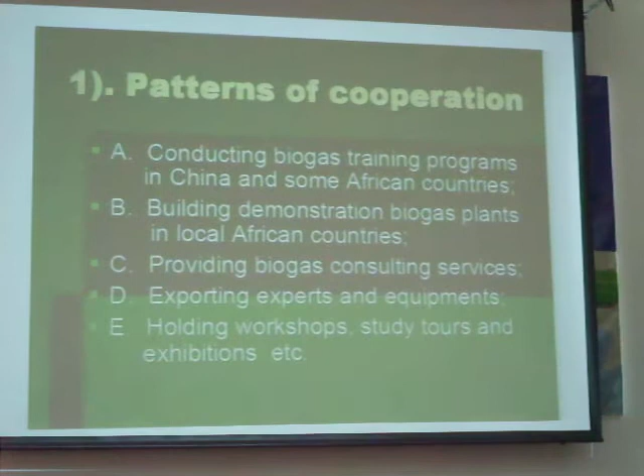One is conducting some biogas training programs in China and some African or Asian countries. Secondly, to build some demonstration biogas plants in local African or Asian countries. Third, to provide biogas consulting services, also exporting experts and equipment, and holding some workshops, study tours and exhibitions, like what we are doing this time.

Some major fields in biogas technology application. Generally speaking, the activities of biogas cooperation projects are in the following 3 or 4 major fields. First is rural household biogas digesters. Second is large and medium-sized biogas plants at animal farms. Third is industrial biogas plants for wastewater treatment.

Or also the decentralized wastewater treatment system, that is DEWATS. You know, DEWATS is mainly for domestic wastewater treatment, which is not treated in a centralized, pipeline way, but treated in an individual on-site way. That is, with no energy consumption, no management, and also for domestic waste, where we can get anaerobic and aerobic treatment at the same time.

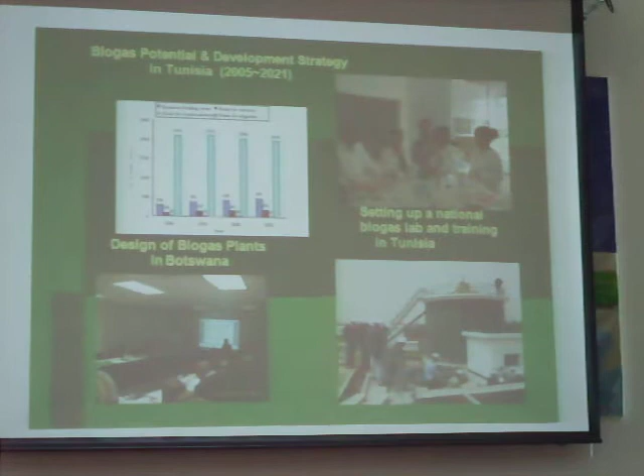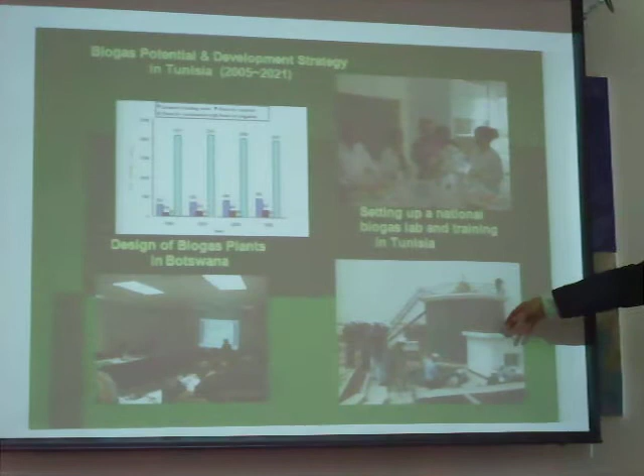Also, some activities we have conducted in other developing countries like Tunisia. For example, the first demonstration plant we built was a Chinese government donation project with a chicken farm. This plant was built in 1999 and was put into operation in 2000, and until now it's working very well.

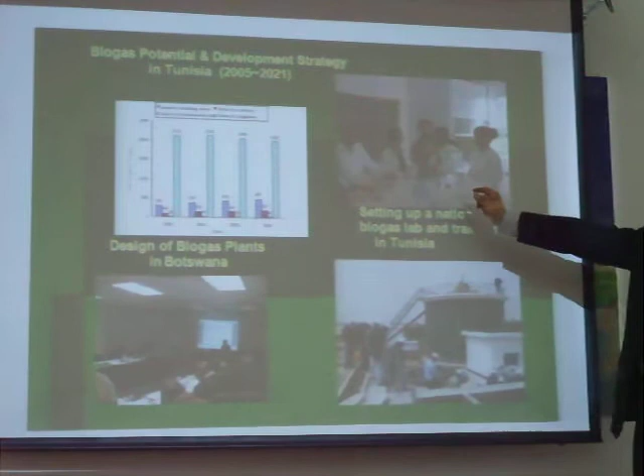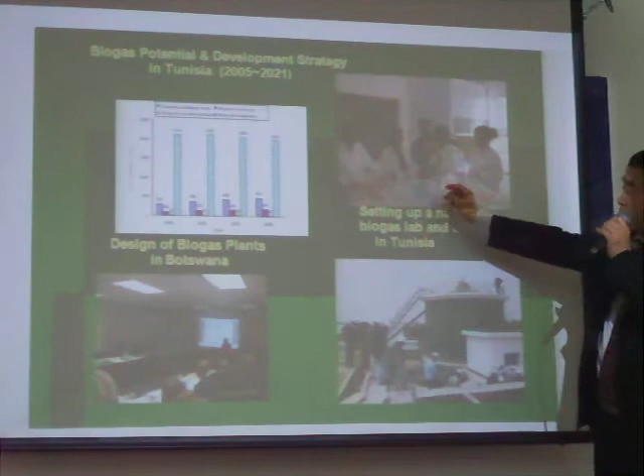And the second project we have done in Tunisia was also requested by the Tunisian government. We set up a national biogas lab, and all the equipment for the laboratory was sent from China to Tunisia. And some professors came for the training in Tunisia.

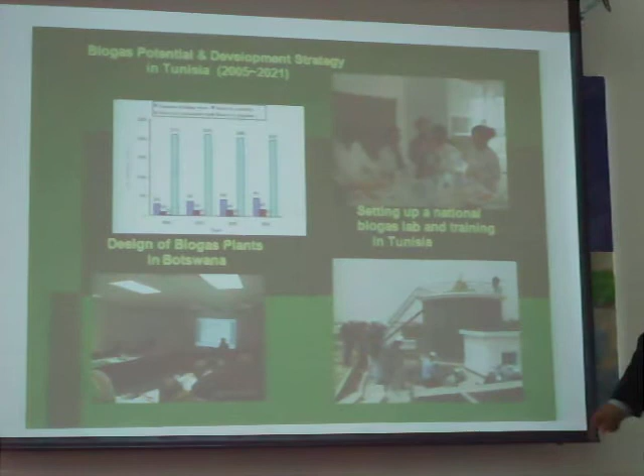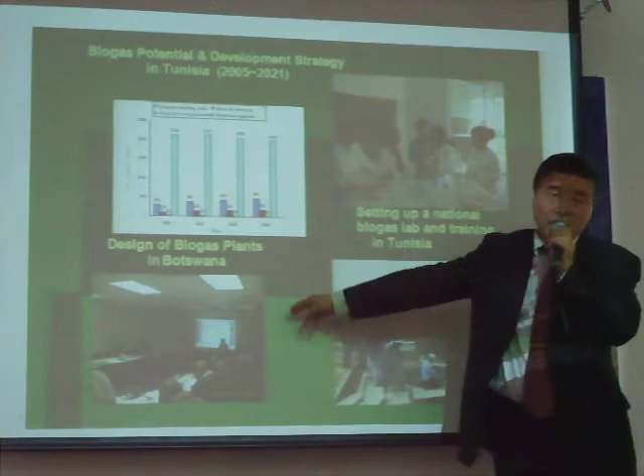And also we have done a national feasibility study, a biogas potential study and a strategic study, determining the potential and the development strategy in Tunisia. So that is one of our activities. Another is we also gave some designs in Botswana, so different African and Asian countries.

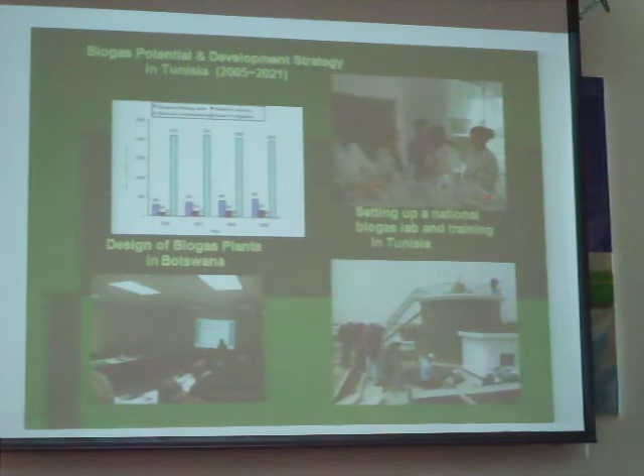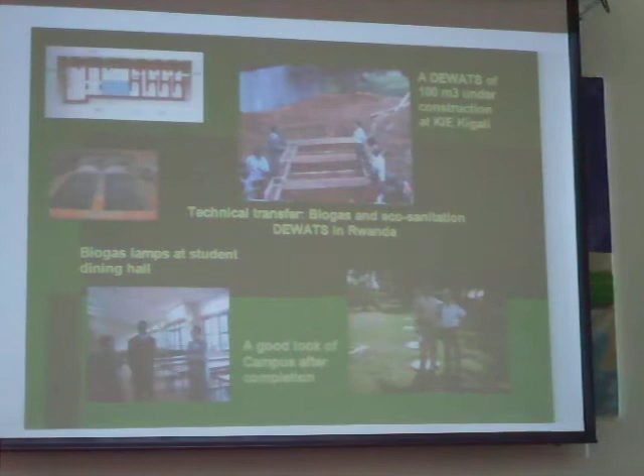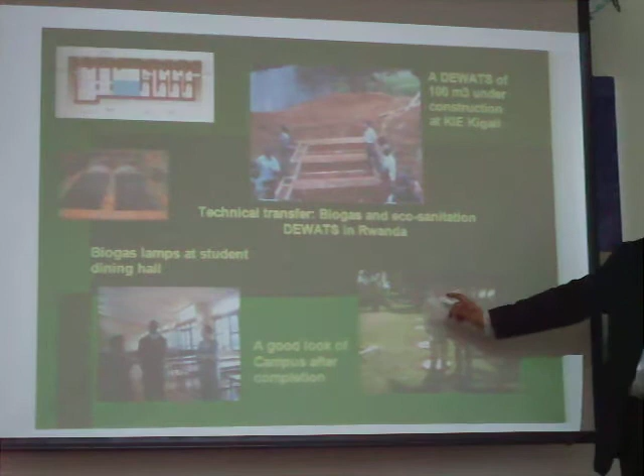This is another system we have done, a DEWATS system. This was in Rwanda. We did some work there. You see, this is a university compound. Before building the system, when you entered this campus, everywhere it smelled very bad because the sewage flowed everywhere. So the principal of the university complained a lot.

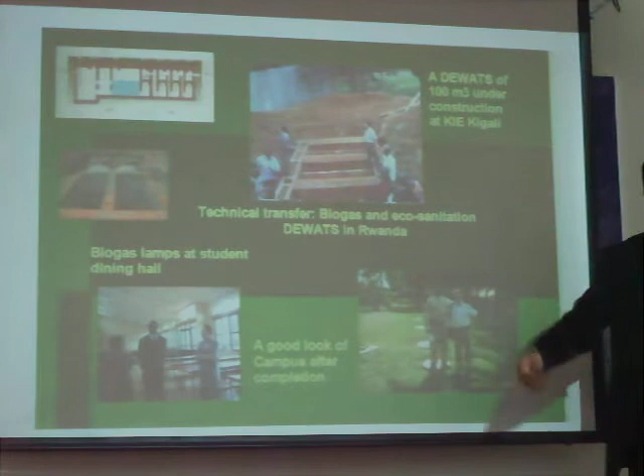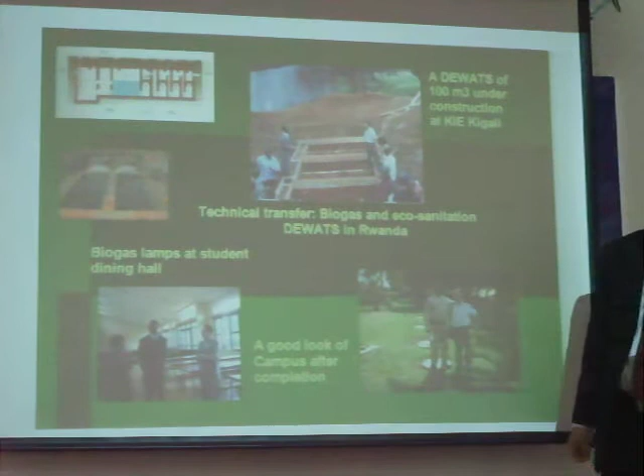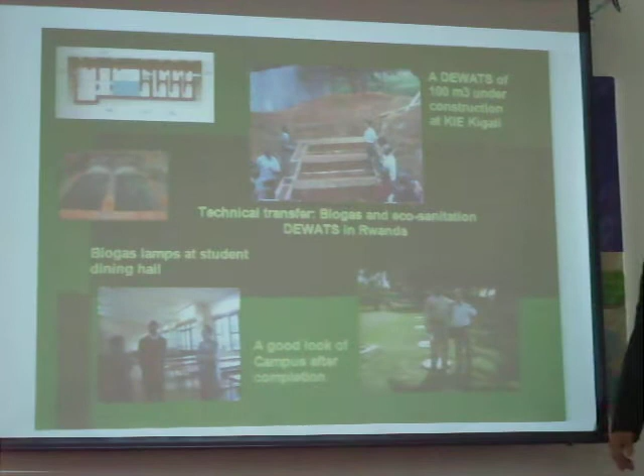So he urgently requested us to find a solution. Then I said, it's okay, we can build one plant for you. Then it solved the problem of domestic sewage. Originally, it was planned for treatment of 300 students' wastewater, but actually it handles the sewage of more than 400 students from the students' dormitory.

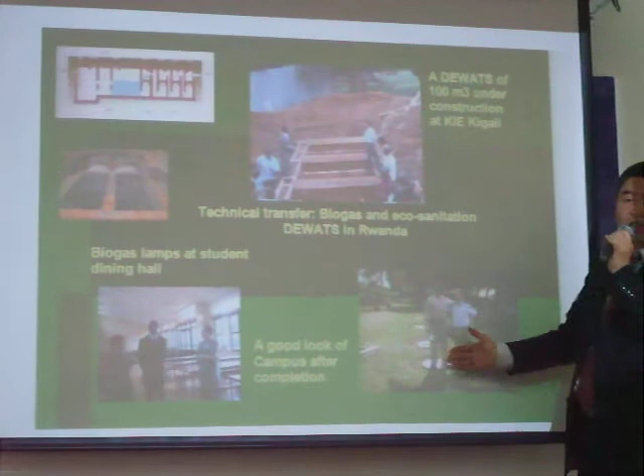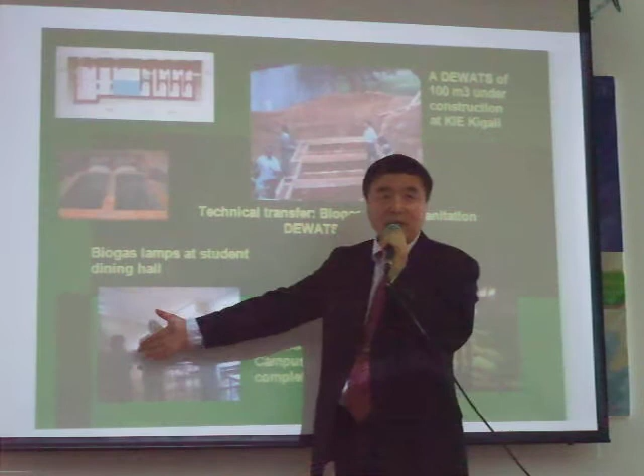Then our ambassador and the Minister of Foreign Affairs came to see it, because not only does it help the sanitation and the environment, and it looks nice, but on the other hand, it gives fuel for lighting and cooking in the students' dining hall.

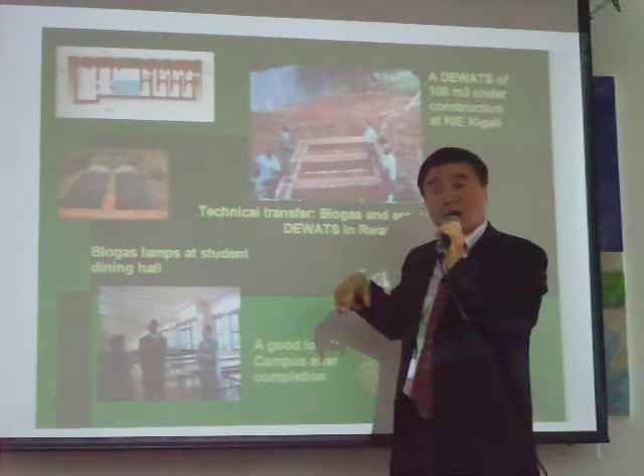Here, this is a dining hall for the students. Because there, even up to now, there is a shortage of electricity. In the evening, students came to enjoy the light from the biogas.

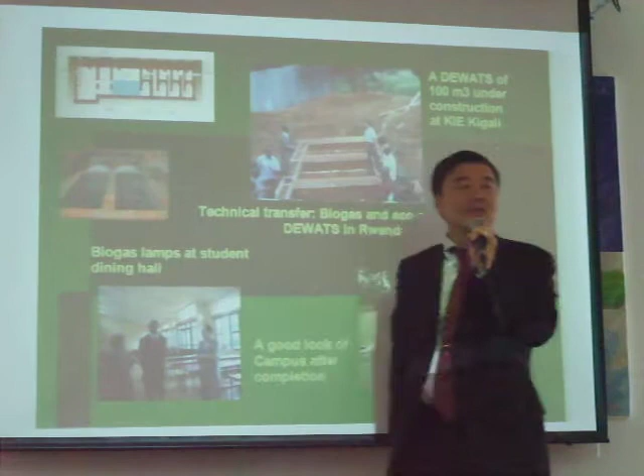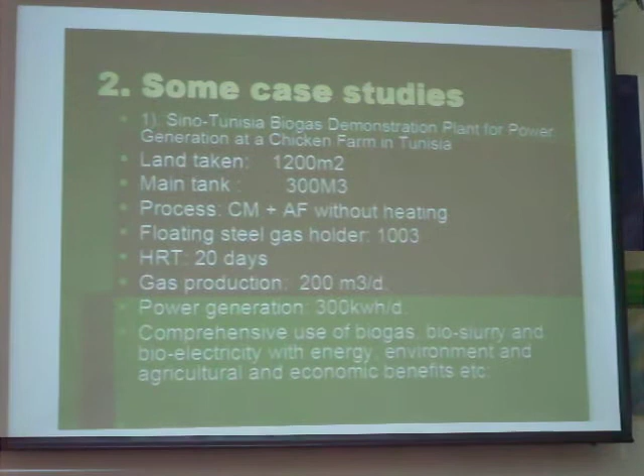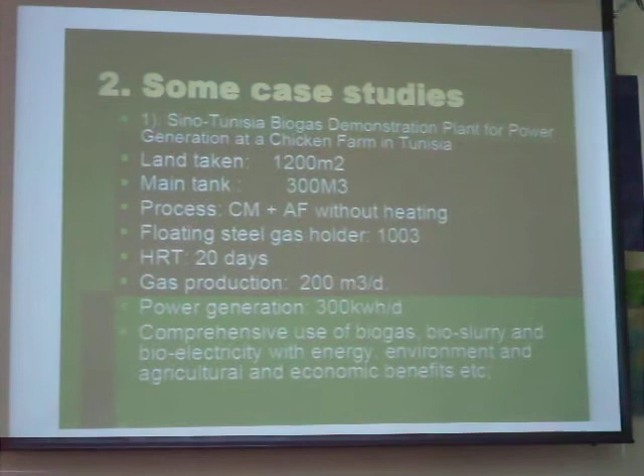That is the big plant we have built. One is in Tunisia, another is in Tanzania. Also, we can give some case study here, like the land. It's a wasteland. We chose a poultry farm, animal farm, and plantation. So the land take is 1,200 square meters, and the main tank is 300 cubic meters.

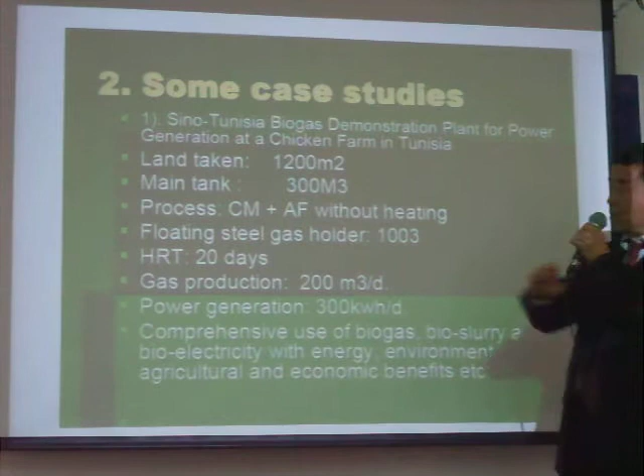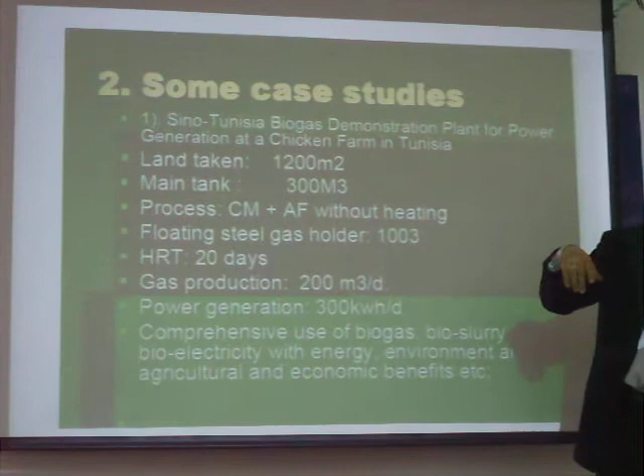And the process we take is complete mixing plus AF, the anaerobic filter, without a heating system. But in summer, it's too much gas. They cannot use all, then release some gas. The floating gas holder, sorry, here it should be 100 cubic meters. There's a small mistake. And HRT is 20 days.

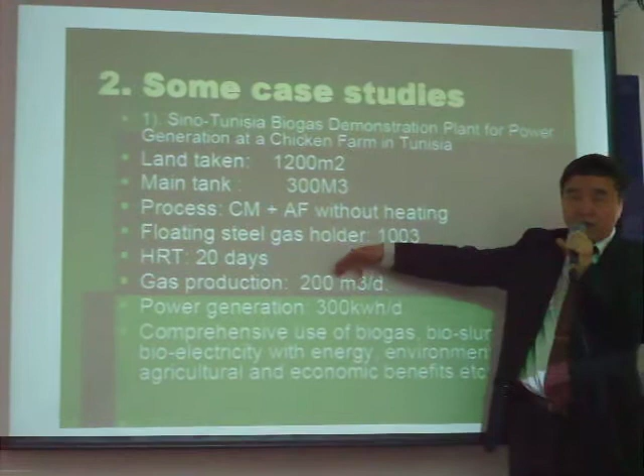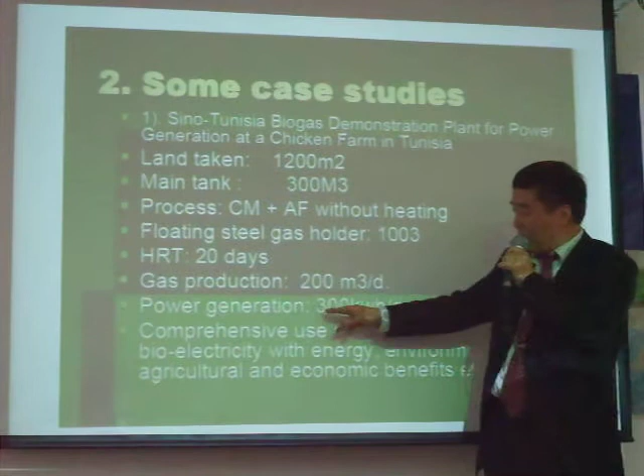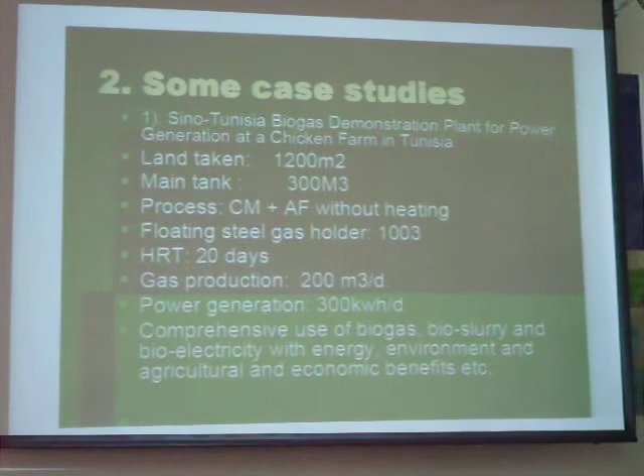And gas production is designed for 200 cubic meters per day. But actually, sometimes in summer you can get about 250. And power generation is about 300 kilowatt hours per day. A comprehensive use of biogas, bioslurry, and bioelectricity with energy, environment, agriculture and economic benefits. That is a model for this plant.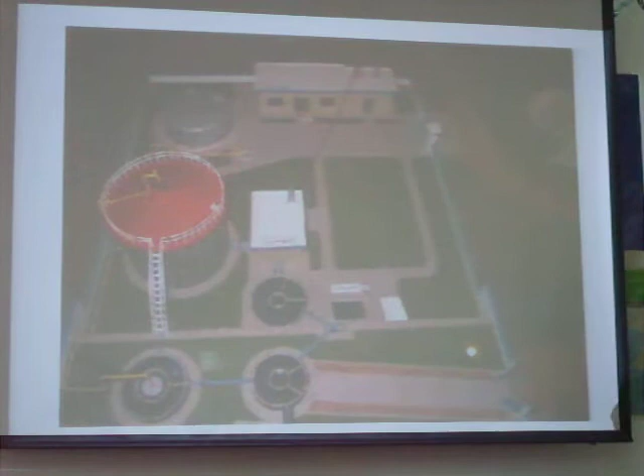In this model, for example, if in your factory you first want to build or design a biogas plant, you should have a model, not only the drawing for designing, but also a model to demonstrate. For example, this is the front gate. This is in the farm. This is the side gate. Then the slurry comes this way to the pretreatment tank, then going to the pumping house.

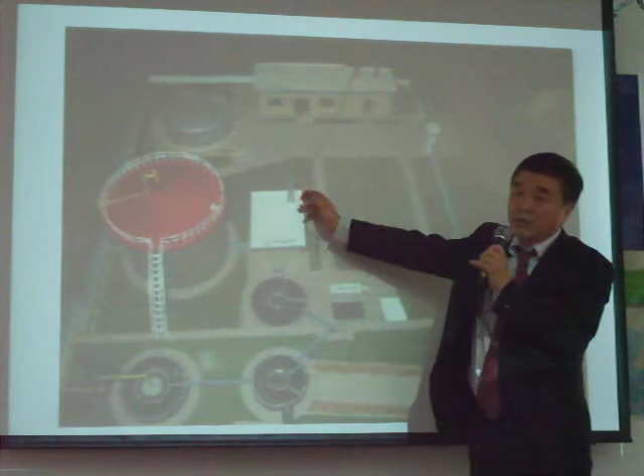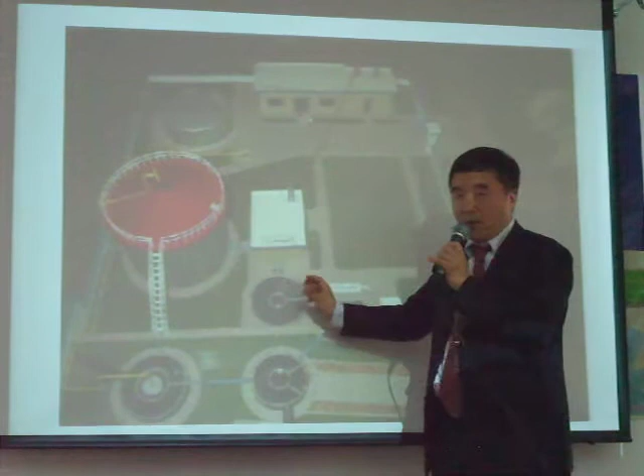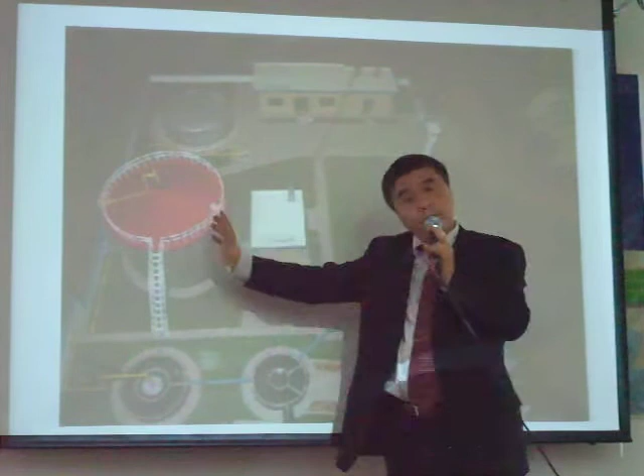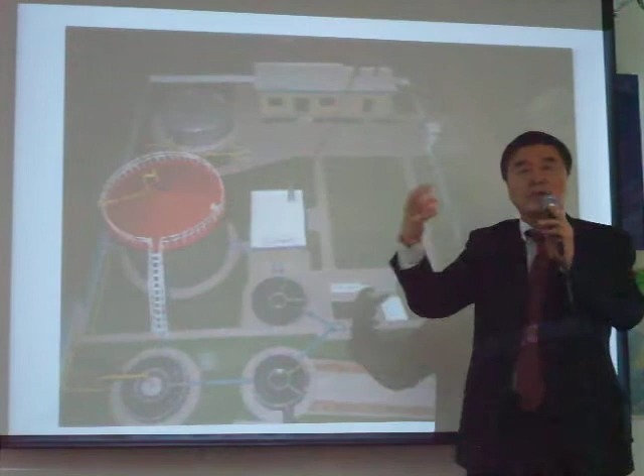From the pumping house goes the slurry, fresh chicken manure mixed with some water in proper concentration. Then it gives gas here from the main tank. This main tank at that time was built with concrete. And inside, we put some filter, so it can absorb many bacteria, methane bacteria, which gives more gas. The yellow line is the gas, which is collected in the floating gas holder. Then the gas is supplied to the generator house.

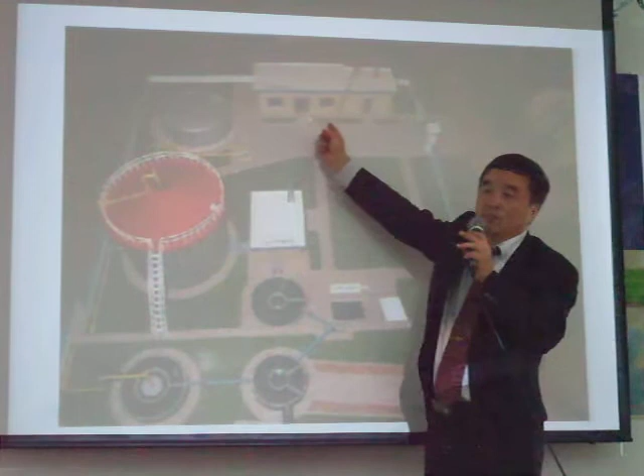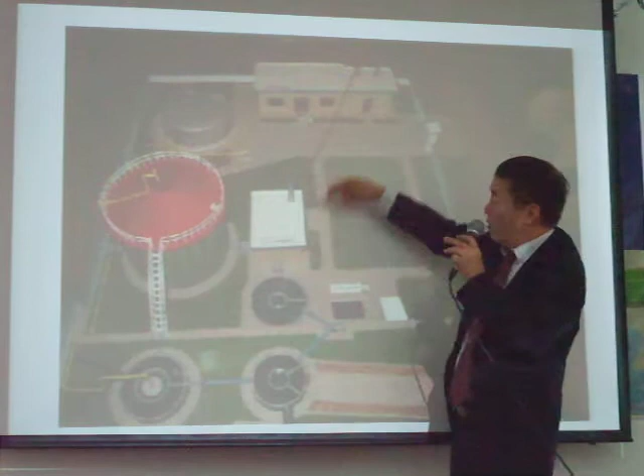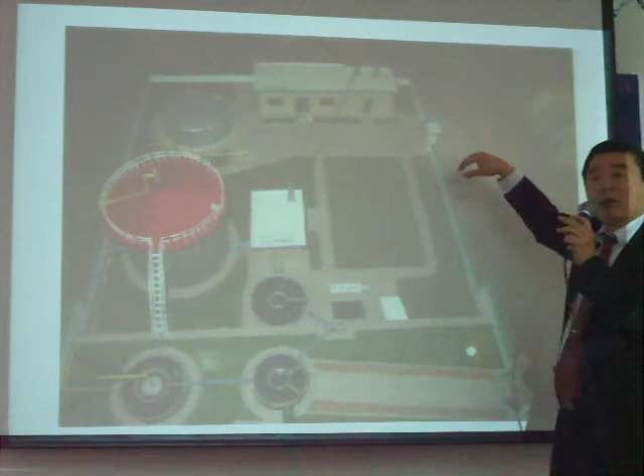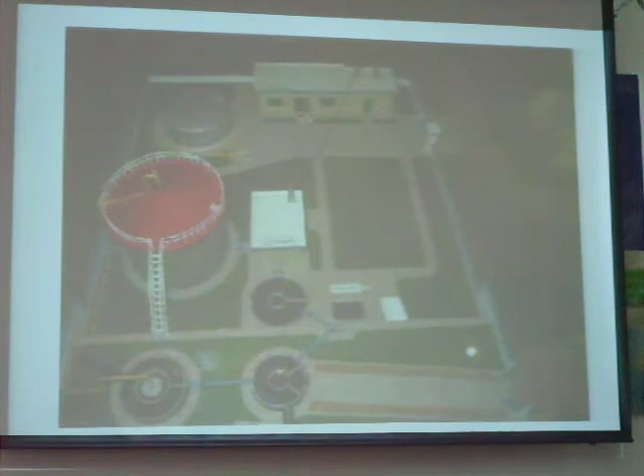From the generator house, part of the electricity is used for the biogas station for pumping or other pumping. Then the other electricity goes to the farm for other machinery or chicken house use. So that is the model which is used for national exhibitions, for environment, renewable energy, or agriculture exhibitions. Because this is a greenhouse, the bioslurry is used everywhere in this farm.

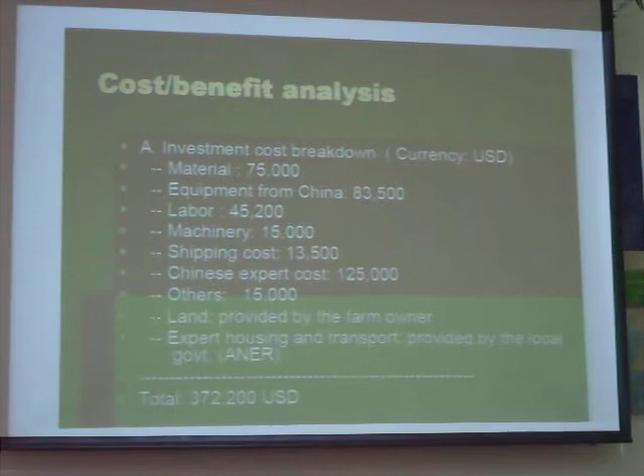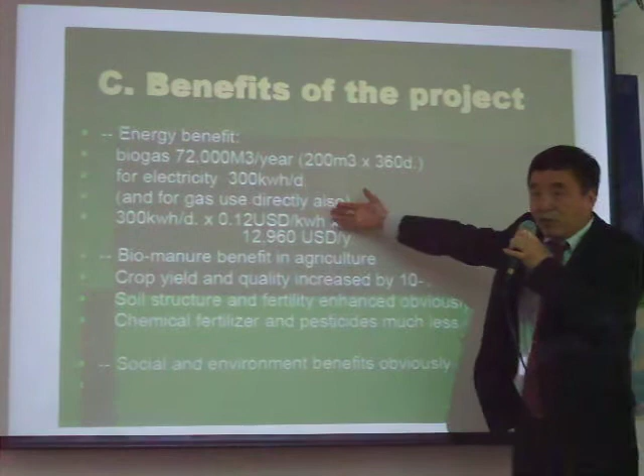So this, we can see the biomanure. This is the energy benefit. This is the biomanure benefit for agriculture. So biogas could be multifunctional for energy, for agriculture, and for sanitation and environment. So that is why government and people are now much more aware of biogas.

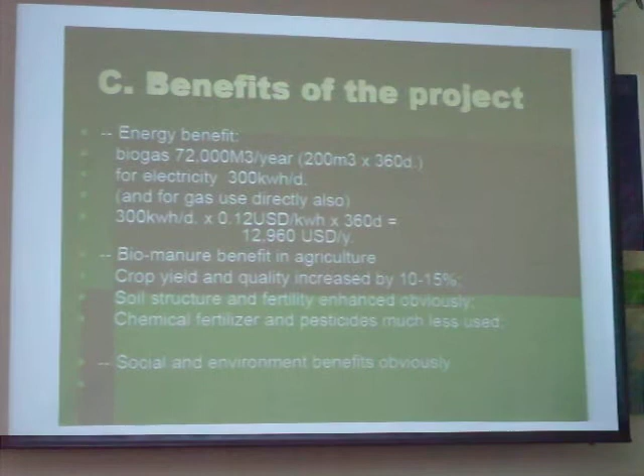You see, even at this time in Africa, many government officials, even the governor, say it is not an alternative, but it is a must for our government to start to build biogas systems. It is not an alternative, but a must. So they realize the importance of biogas technology, and also some social and environmental benefits.

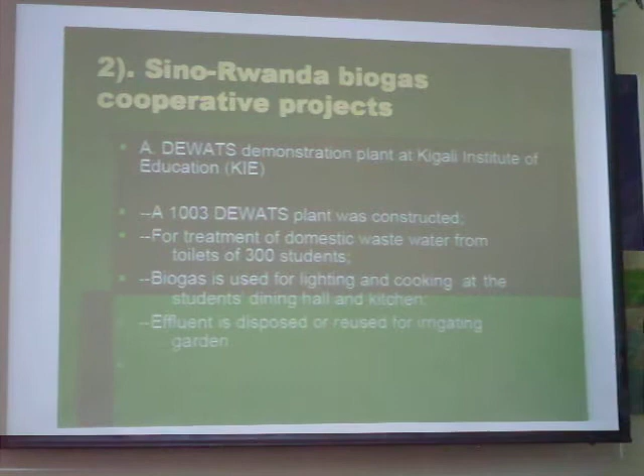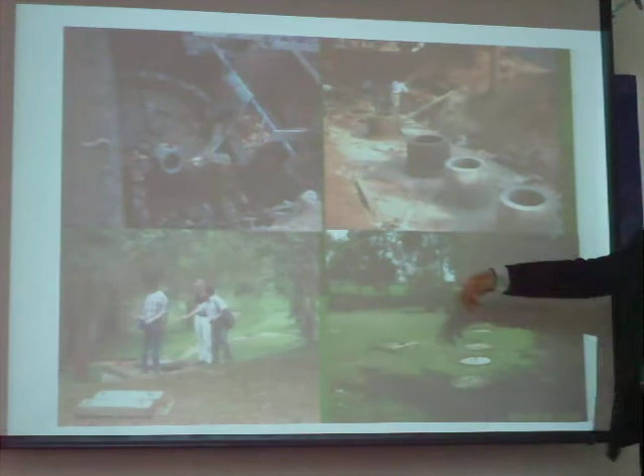Also another case study is a DEWATS system. We can see DEWATS for treatment of domestic wastewater. So like this, if we compare with the site before building the biogas system, they dug a lot of channels, and they don't have space to hold the sewage. Then the sewage comes everywhere in this small hilly area in this campus.

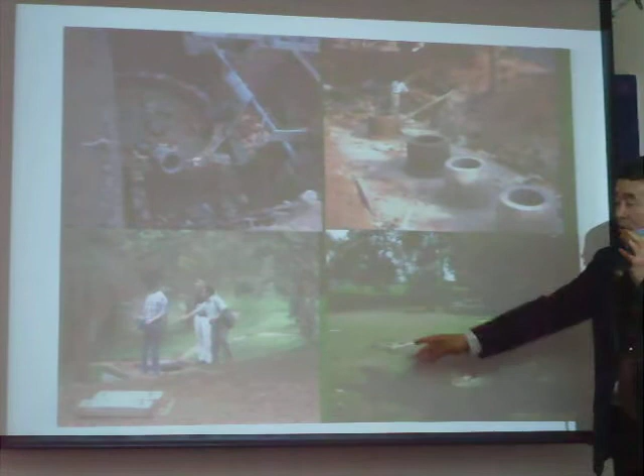So students and teachers all complained about this. Then after this, it solved this problem. So after it was built, the International Red Cross came to evaluate also. This is construction underway.

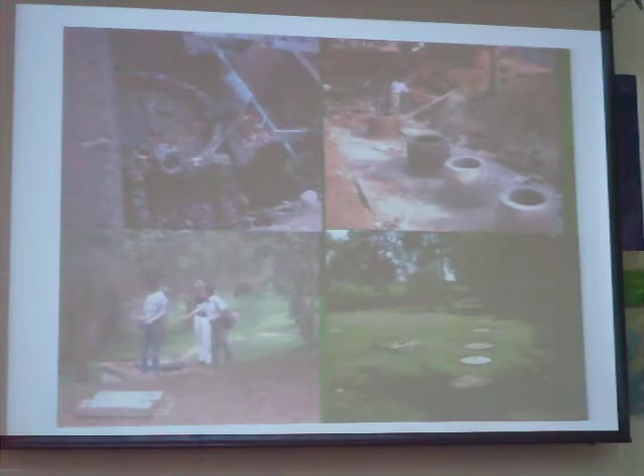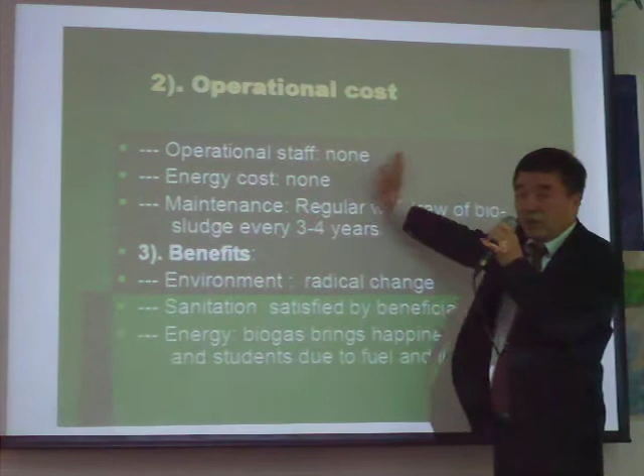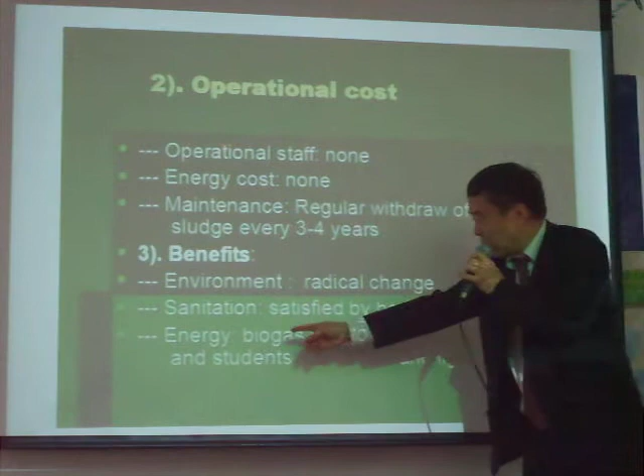Some benefits for this plant also. The cost study and the operation cost. So you see this operational cost is zero, energy cost is zero, and maintenance is only some regular withdrawal of biosludge every 3 or 4 years. And some benefits from the environment give a very radical change, and the sanitation is very satisfying to the beneficiaries, and energy biogas brings happiness to the kitchen and the students due to the fuel and lighting. So this is a very successful case as well.

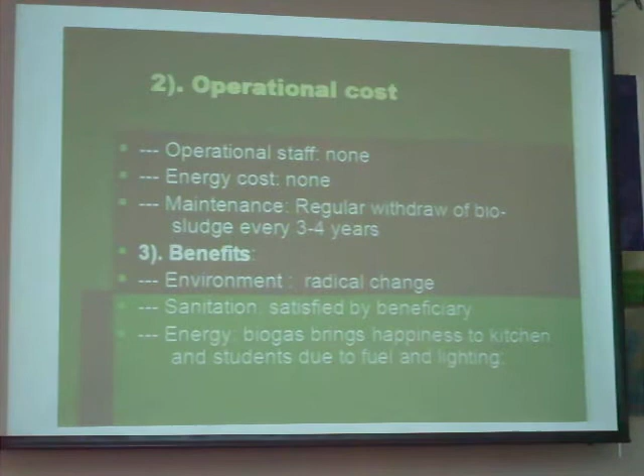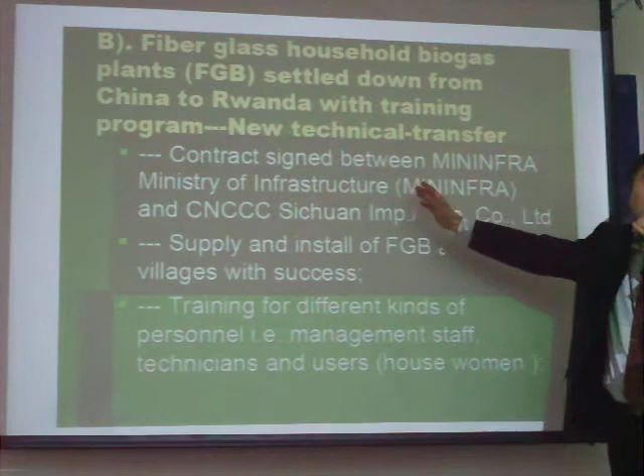Then we come to the domestic biogas plants, which we have done in some Asian or developing countries. For this, we have conducted one contract with the Ministry of Infrastructure in Rwanda, and this was directed after the first demonstration project, government to government. Then the Chinese enterprise, that is CNCCC Sichuan, signed; I, on behalf of this company, signed the contract directly with the Minister of Infrastructure in charge of energy.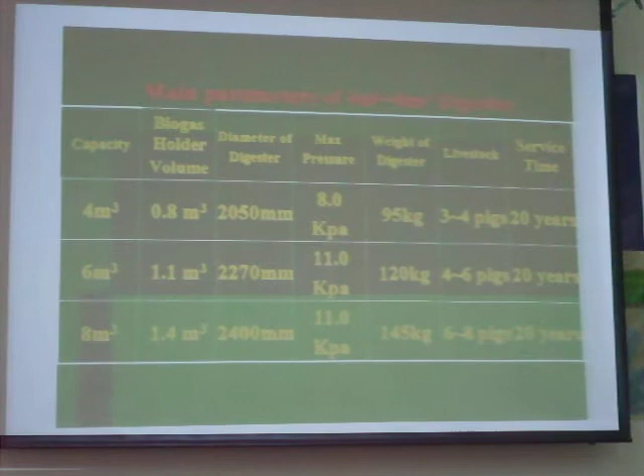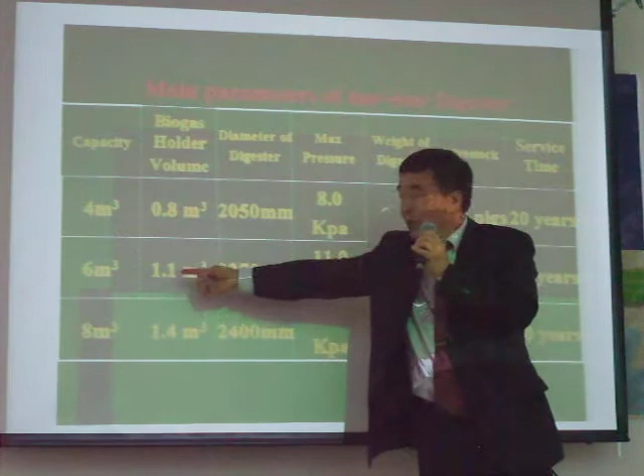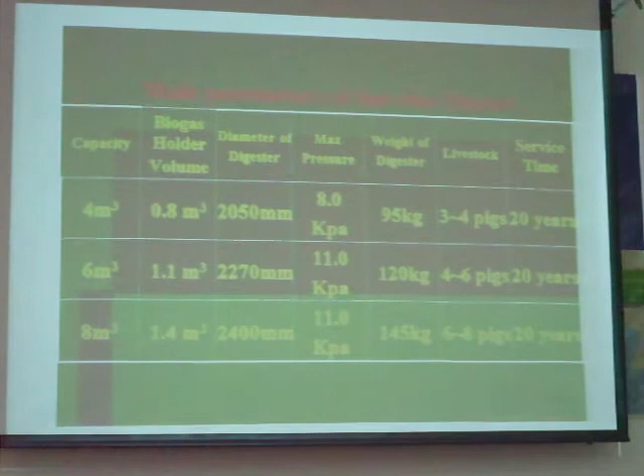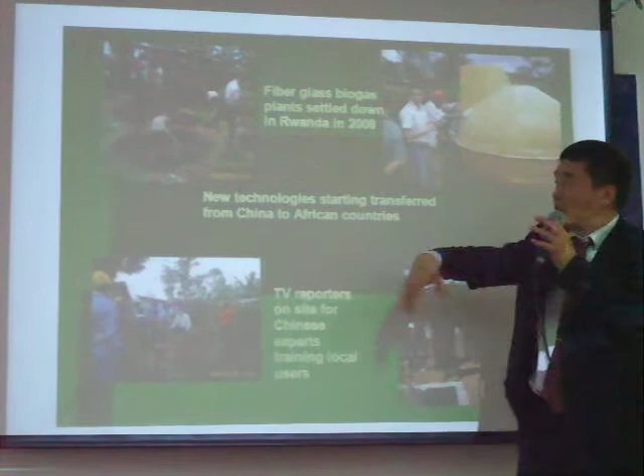Some key parameters: you see, this is the volume for different sizes of this plant. Normally we take 6 cubic meters. This is the diameter, then this is the weight, and this is the livestock which is going to be used. This is the lifespan, more than 20 years without maintenance. We see it under construction, because the plant could be designed differently according to the size, maybe in a straight way or in another way. You see this plant here, in the triangle way, still it works.

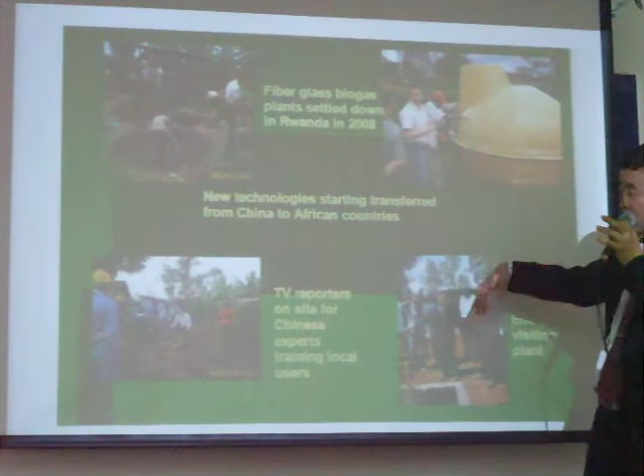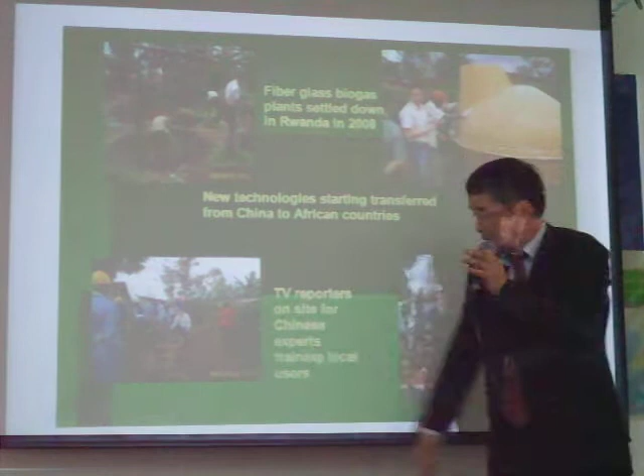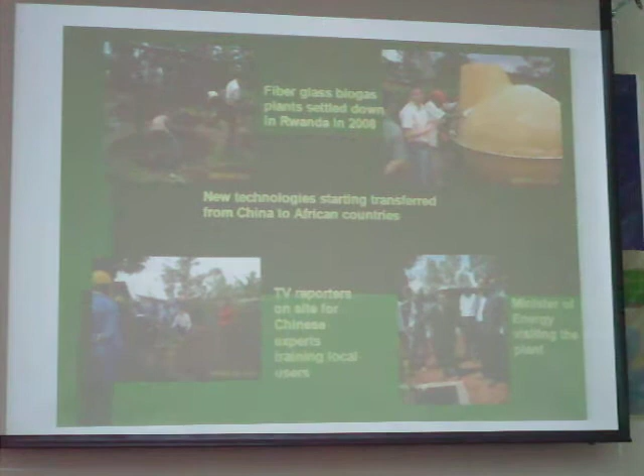This is for assembly on site. These are some TV reporters. We are conducting the local training for the local users. And this is the Minister of Energy inspecting the site. You see, I wore the same dress. And the benefits. At that time, the USD was much higher. So now we can say that the plant for 6 cubic meters is around more than $500 due to some inflation and the rate against the US dollar, like the Thai baht getting higher against the US dollar.

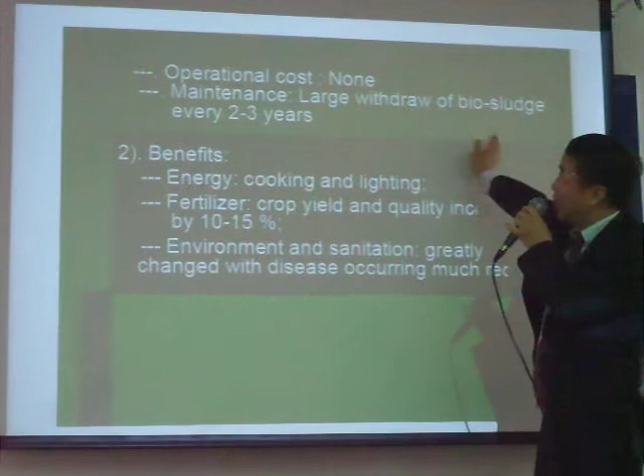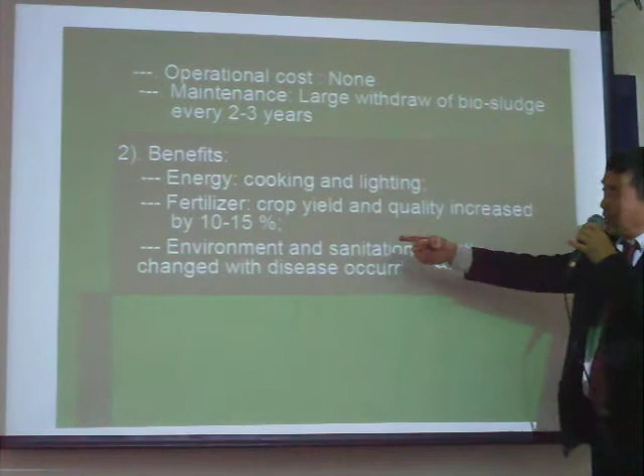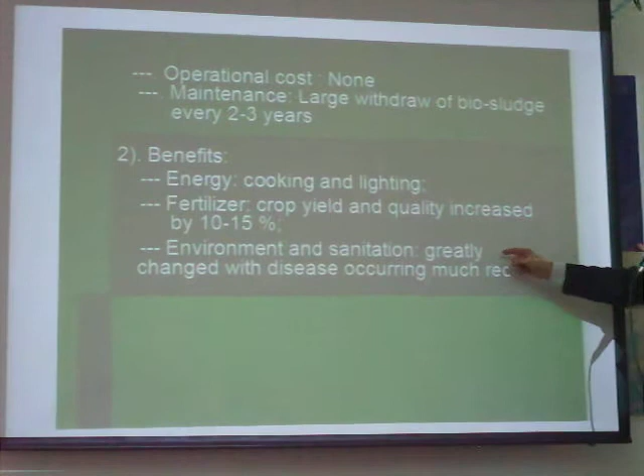Other benefits: operation cost is low, and for maintenance, only after 2 or 3 years you take out some sludge from the bottom. So this is the energy benefit for cooking and lighting. And with the fertilizer, the crop yield and quality increased by 10 to 15%. Environmental sanitation also saw great changes, with some diseases much reduced. So the farmers, the users, benefited a lot. So this time, the Rwanda government, after we had a meeting with them, pushed this technology and products without any doubt or problem. They want to make a big stride.

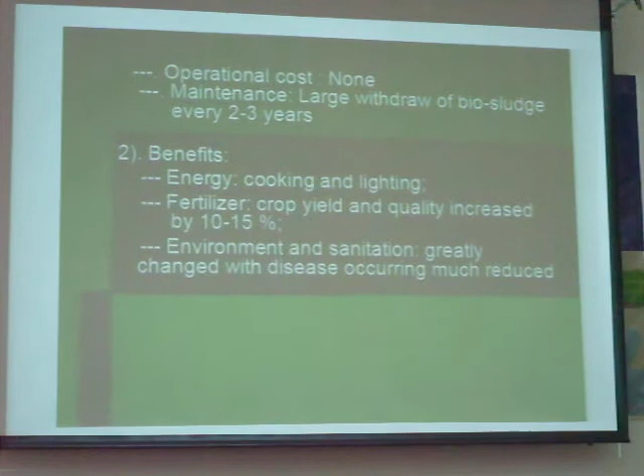Now we come to some main factors affecting biogas development in developing countries. In keywords, we can say it is high cost, low skill, and less subsidy, which inhibited biogas development in most developing countries. In detail, we can say the lack of institutional and financial structure, and a lack of long-term government policy taking biogas as a part, because the Chinese government, since 2005, put biogas as the second place in the rural infrastructure system.

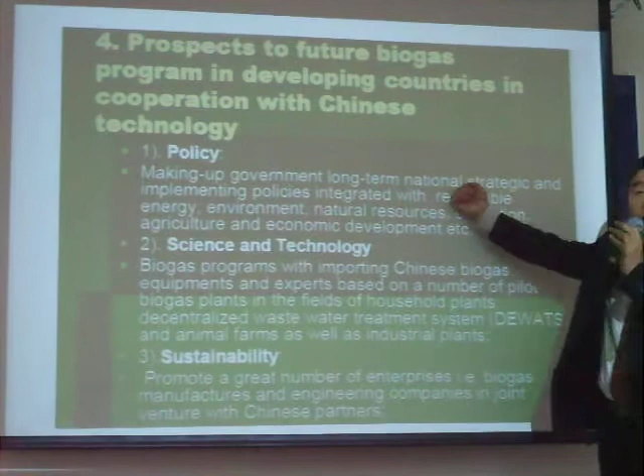Then we come to science and technology. So a biogas program with import of Chinese biogas equipment and experts, based on a number of pilot biogas plants in the fields of household plants, decentralized wastewater treatment systems, and animal farms, as well as industrial plants. So I think this part is a foundation, but government policy guarantees the development in financing and in system production, taxation, or land taking. But science and technology is very key in this sector also.

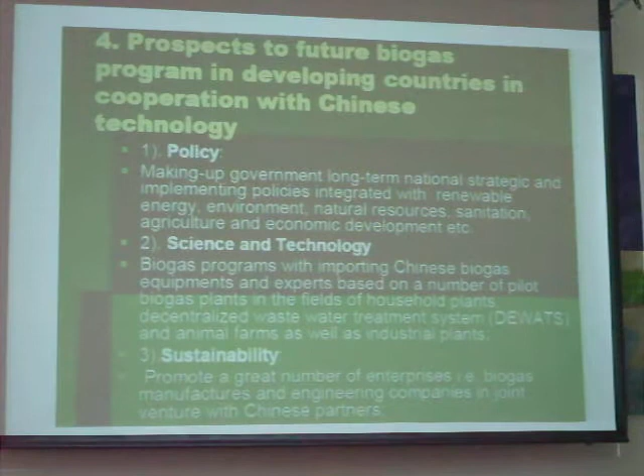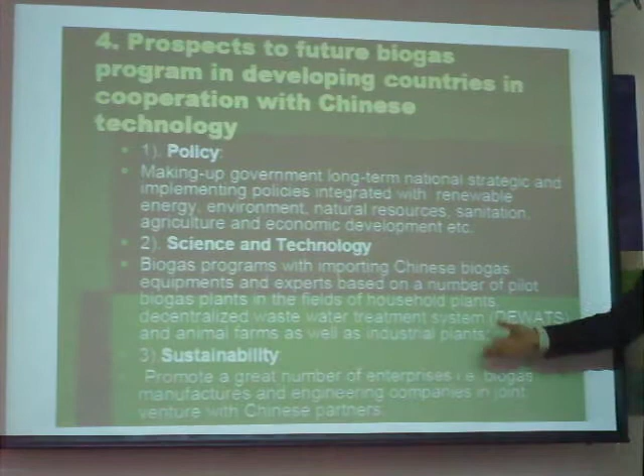Then comes how to make it sustainable. That depends on a number of enterprises. Without enterprises, even private enterprises, for manufacturing equipment and for engineering, like this time I brought some owners of manufacturers. And also for design and construction. Then for management.